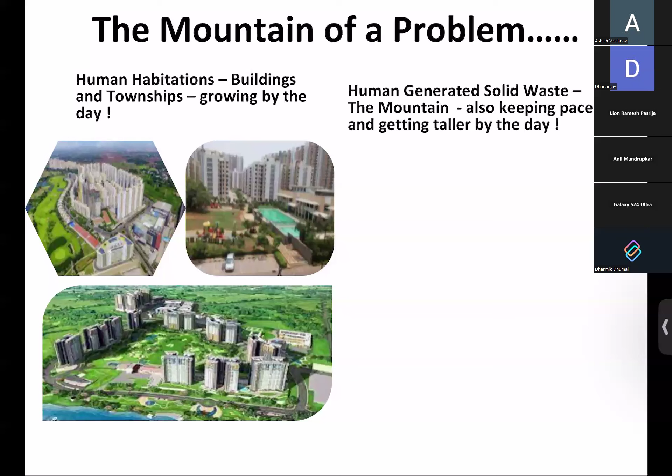But while these things are coming around, what is happening is the people staying in these buildings and houses are also generating even more waste. So the mountain is also keeping pace and getting taller by the day. This is what is happening all around us, and some of you who would be going past Hadapsar would possibly notice it more. I think it happens across Indian cities.

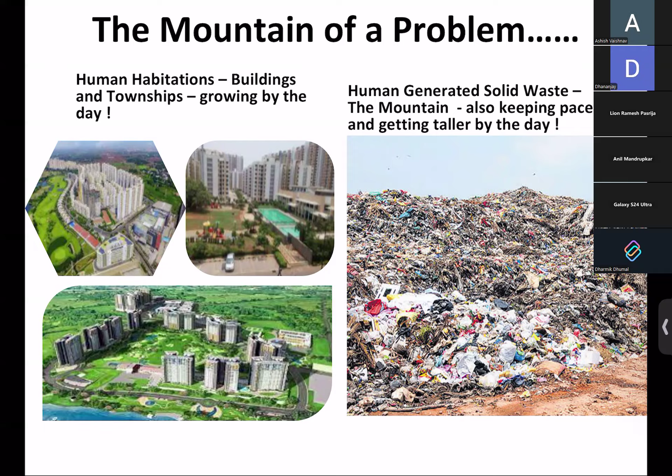Just to give you an idea on what is the quantum of waste India has, India generates almost... now unfortunately this is a surprising aspect that in today's digital age, for MSW there is no credible data which I have found beyond this, which is supposed to be data from 2021. So we are now in 2026, 5 years later, and I still don't know because I attend many forums, but still the figure is 160,000, which is 1.6 lakhs every day.

Tons. So, well, we have been focusing on structures, landscape, amenities, all this, but our focus on waste management over the period has been limited to the liquid part. Now STPs have become most common, and everyone is very happy with, or rather trying to put, collection and transport of solid waste.

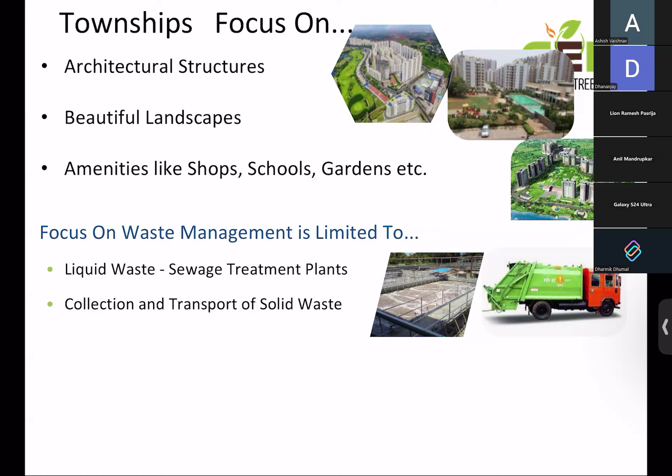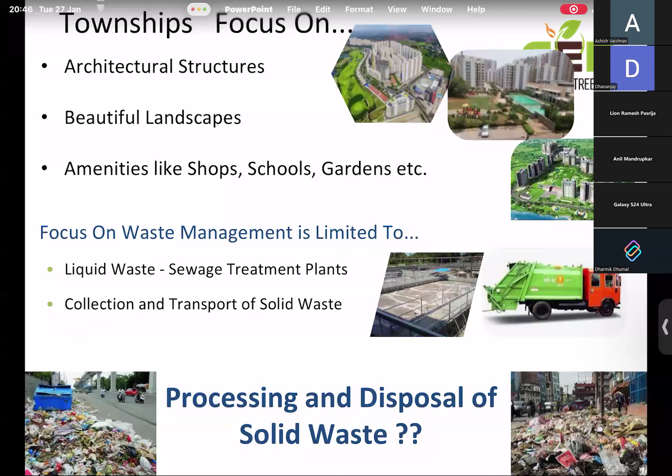You will see a lot of vehicles moving around and people trying to give it to a third party who takes it away somewhere. So we all feel very nice about it. But in real sense, we have not been able to do something on the processing and disposal of the solid waste. And that's why it moves from your houses or societies, and ends up somewhere, because there is no processing and disposal tied up. So this is the big challenge which today we have, and I hope you all agree to it.

So, well, taking a slide from the Swachh Bharat mission again, which has been talked about since 2014, the components of MSW and what are the different types of waste and where they end up. Very clearly at the top of MSW, the word which is told is segregation at source.

Now, at this moment I won't like to comment, but all of you know that even at most homes this segregation is not done. And if at all it is done at home, at the next level, a housekeeping guy or the person who takes it away into the vehicle does not really care. So while this could be seen as an act of someone disregarding it, I think if you get into the basic nature of it, why it would be happening, you will get some more insights into what happens. So we have been also trying to address that part as a part of a solution.

So, well, coming to the two kinds of waste, one is called biodegradable waste and the other non-biodegradable. Now these are all very technical terms, but we would call it wet and dry, which is I think easier. So the solutions given for biodegradable waste are composting, which all of you would have heard, and the newer thing which is biogas. Some of you would know biogas, but the word CNG has now come, which is compressed natural gas, the bio-compressed gas. So that is also coming.

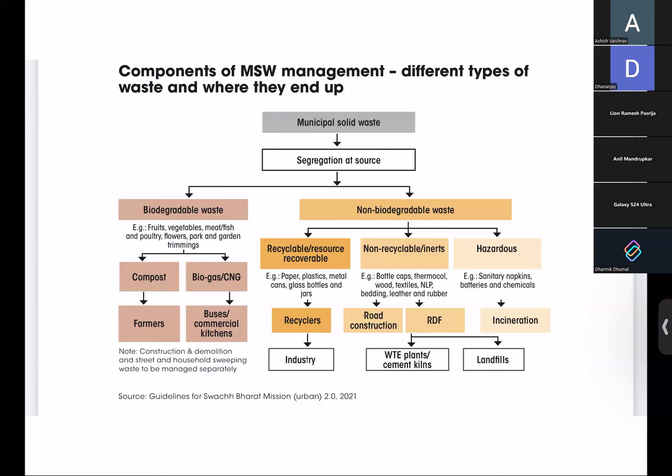And then the hazardous part of the waste, which is supposed to be incinerated - so this is it. But having studied the waste, we have tried to give the classification a little differently. Not very different, but because the waste is the same, we call it wet and dry.

The organic kitchen and market waste is there, and there is also the garden waste which comes up, which is organic in nature - the leaf litter, as we call it, or the horticulture waste. Then the dry waste part - we call them recyclable, non-recyclable, but we added the word combustible to make sure the fuel element is captured. And then the rejects, and then the non-combustible.

So when we observe the waste, we actually spend a lot of time in societies like Blue Ridge and others to understand the waste, where there is a substantial quantum coming. So glass, metal, high-grade plastic, paper, cardboard, and e-waste go into recycling. The non-recyclables are soiled paper, cardboard, low-grade plastic, cloth, mattress, leather, shoes, and all those things. Then the rejects, which are incinerable, are diapers, napkins, and similar rejects. And then the non-combustibles like soil.

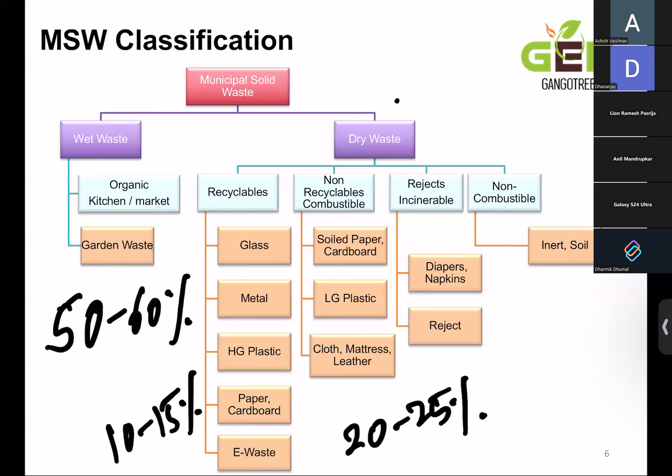So the estimate which we came out with was that almost 50 to 60% of weight becomes wet waste. Only about 10 to 15% of the overall volume is recyclable. And this is the big elephant here - 20 to 25%, which is what you see causing the major issues.

So what we did was also secondary research in terms of which states are leading in the generation. So you have Maharashtra at the top. You will see that population and industrialization are contributors to this. These are the kind of numbers you will see - Maharashtra generates over 22,000 tons every day.

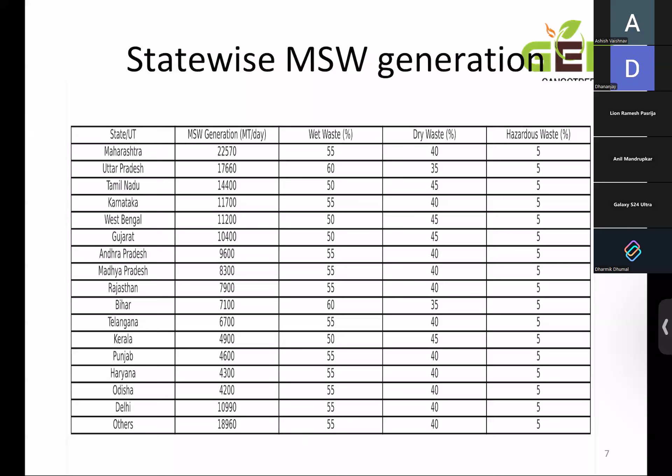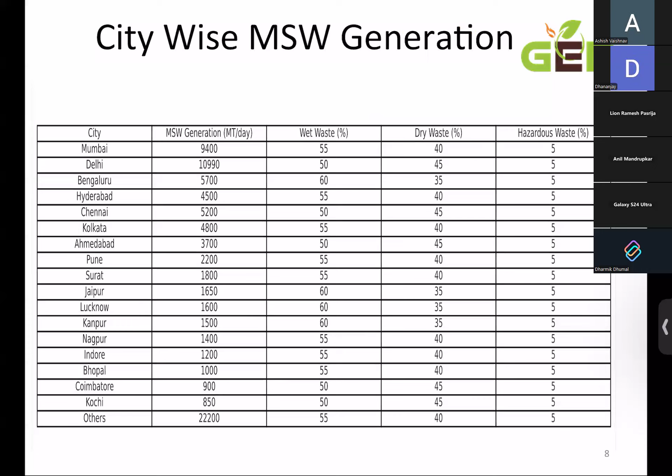So a breakup of wet and dry in terms of percentages is also made. We also studied what are the prevalent solutions for wet waste - like we said, composting and biogas. Composting is done at a residential level, at a medium-scale society level, or many of the older cities used to have very large scale plants of 10 tons and above. Some of you might have seen that. And similarly biogas, which is an alternative, was largely happening at small scale, and now it has started happening at large scale.

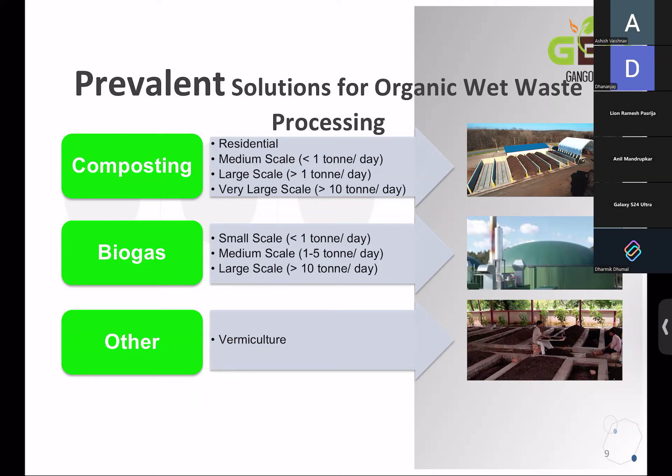People were talking of vermiculture, earthworms, doing all this. But these were all very small activities. If these were the ways you could actually do your waste processing, why has it not happened?

So we studied the shortcomings of the waste solutions. Composting happens, it's a natural process, but successful only for small sizes. As soon as you go for bigger sizes, it becomes more complicated with the kind of space required, multiple handling. It's not an overnight thing. It takes 45 to 50 days, 60 days to get into composting, keeping on trying to give it aerobic nature by moving it, almost like tilling in the garden every day.

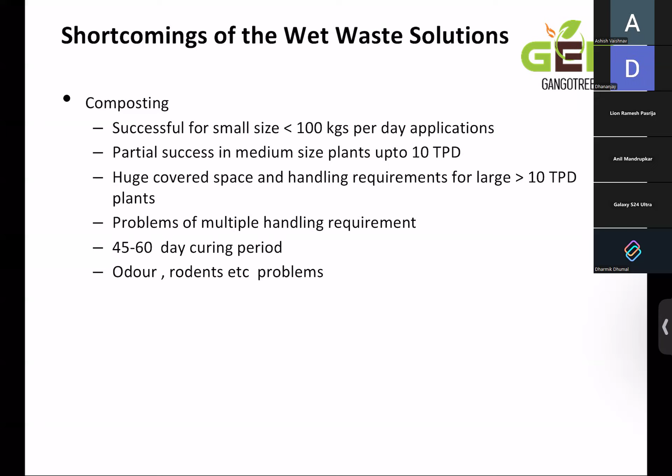And of course it's in an open area, so you have rodents, all kinds of animals and birds. It also generates odor, and there is no major economic benefit. I have heard many places say, why make compost, what will we do with it? And most flats and homes hardly have so much consumption anyway. So people have not been trying much to adopt composting, definitely not at larger scale.

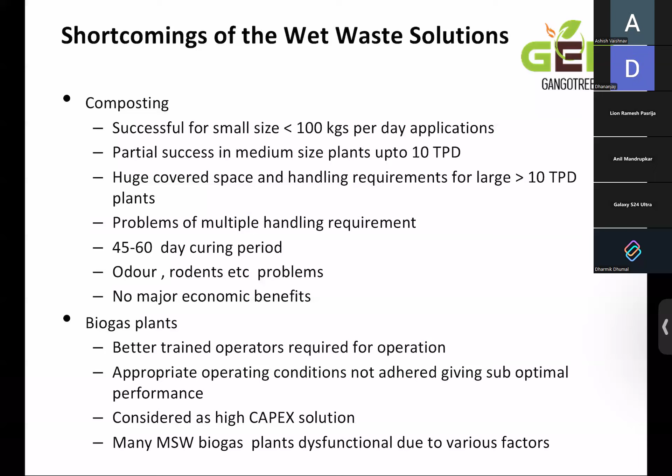So biogas plants, again, there were plants even in Pune, but we needed better operations. The conditions required for operating in terms of technology were also not adhered to. And it is considered a high capex solution, a lot of capital. Many of these biogas plants tried in Pune, Bangalore and elsewhere in a decentralized way became defunct.

Similarly, like wet waste, what are the prevalent solutions in dry waste? We talked of recycling, RDF, and waste to energy plants. So these three are there. So then you wonder, what is the rocket science? Why are we not able to do it?

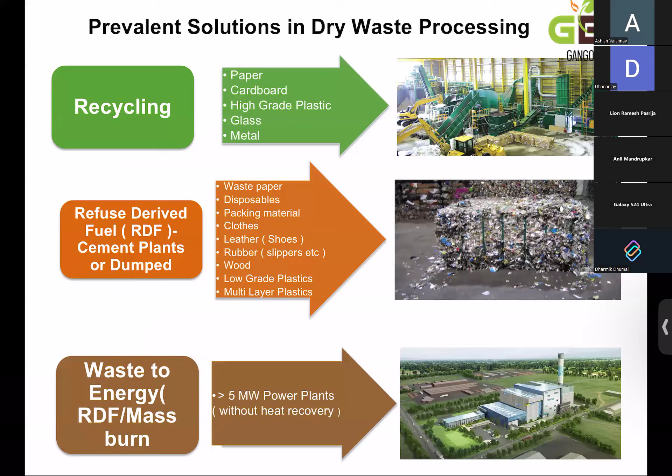So similarly, the shortcomings of recycling technology: gross level segregation is viable, but when you get into a final level of sorting, you need pure material for recycling. You can't mix two types of plastics. Plastics are of 6, 7 types, and that becomes a challenge.

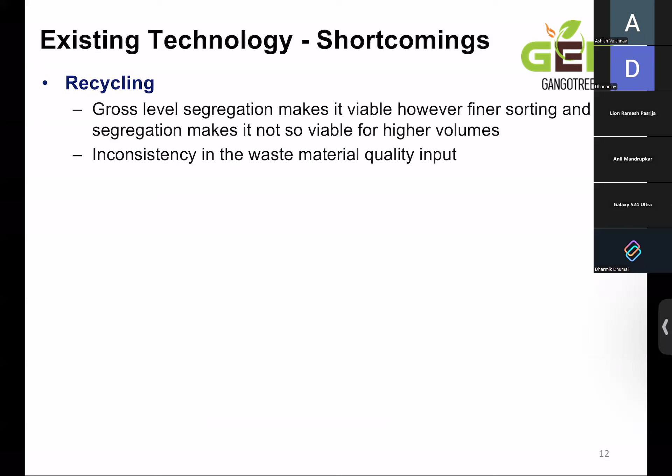Also the quality of the waste material coming in as input is a problem because of the mixing which happens. Similarly, on the non-recycled side, RDF, no one can define what RDF is, because anything left behind is called RDF, as everything burns. There's a lot of mixed waste which happens, and a lot of moisture and water that dilutes the quality of this.

And all this is done at central locations, because from your house, my society, your society, it gets accumulated and goes to places called transfer stations. From there it gets into a bigger truck and goes all the way to Hadapsar. So there's no consistency and there's no control, absolutely no control.

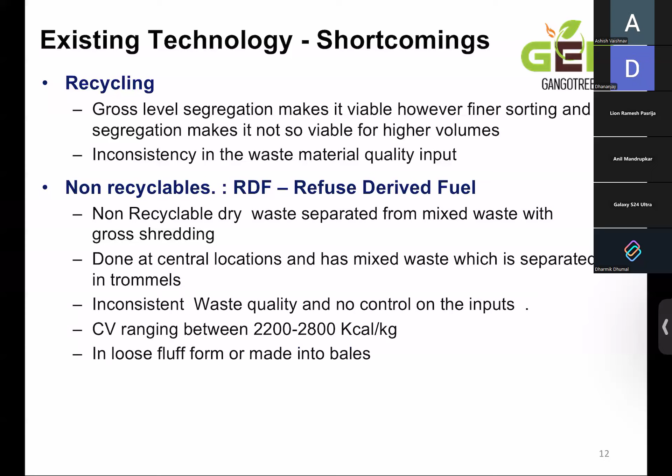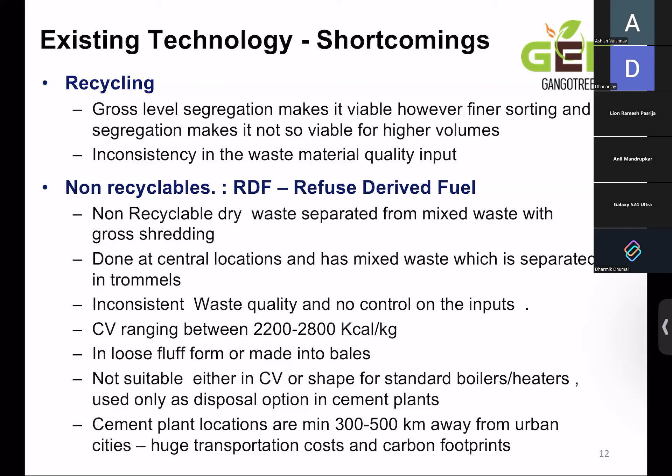And the calorific value is not more than what is stated. Moreover, it can only be in loose form, or it is baled to make it more compact. Otherwise, it's high volume, low weight. There's no size or shape that can be used other than taking it to cement plants, because standard boilers are not able to use this as fuel. And cement plants are far, far away. The closest cement plant from Pune would be in Karnataka, or otherwise you go to Chandrapur, which is 800 kilometers away. Can you imagine your waste traveling every day 400-500 kilometers?

The waste to energy plant is a technical subject. I won't go into too much detail, but just to share, it's hugely expensive compared to conventional power plants to put up a power plant using this waste, almost 5 times more expensive. Calorific values are inconsistent. And because this is only producing power, no waste heat is captured, unlike in Europe and other places. Here the total efficiency of this plant is not more than 20-22%.

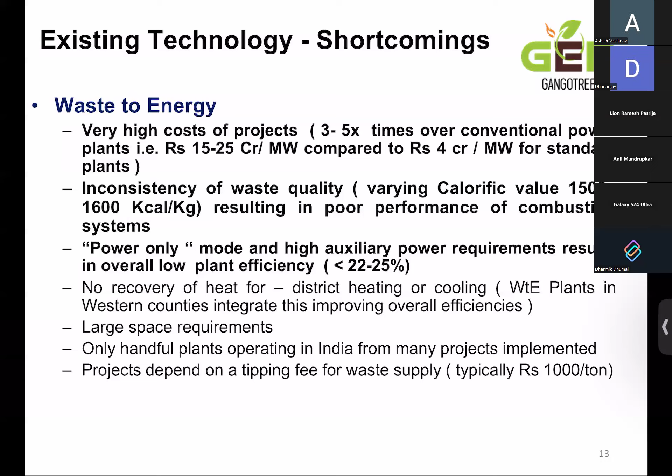So there are huge space requirements, and it usually depends on centralization, because you need 700, 800, 1,000 tons to be given every day. This means the waste has to travel to a single location from all over the city. You can imagine the kind of crisscrossing this would lead to. And then the power tariff to justify this kind of cost is very high, so you pay for disposing the waste and buy electricity at higher cost. That's why in Indian conditions, while plants are being put up, they are not being considered a huge success.

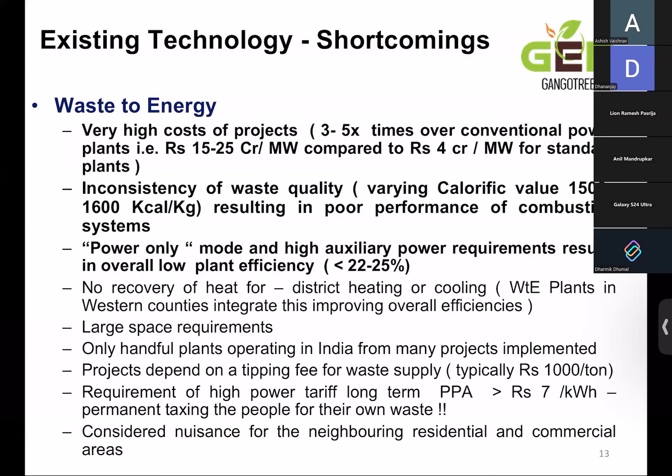Well, we need to change the outlook from waste to a resource.

So MSW has a dry fraction, almost 40-50%. And of that, 60-70% is non-recyclable and getting dumped, because all these solutions are not easy to implement. And it gets burnt in an uncontrolled manner.

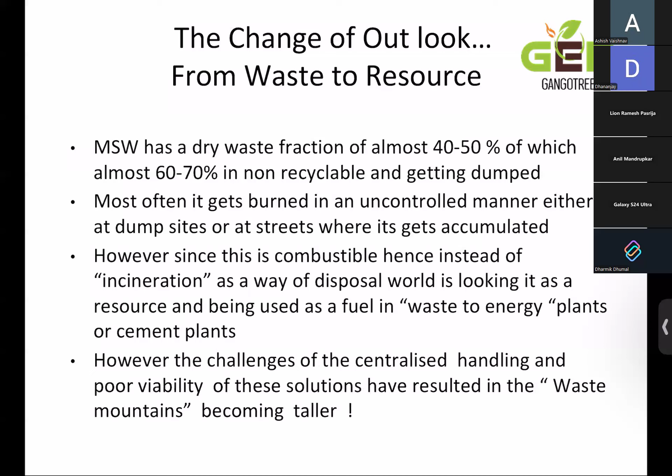And because of the challenges of centralized handling, these solutions have had poor viability, and that's how the mountains get taller. So we just thought, sometimes using a better word gives a little more positive impression.

When I say incineration, it is also burning, but it's primarily like no use of that burning. You are just destroying the material by using fire as the way of the process.

Whereas if you look at combustion, it's like using your vehicle, you're combusting petrol to drive you. You are combusting fuel in a boiler to give you steam, which will drive either the process. So combustion is a better word, which is more scientific in nature.

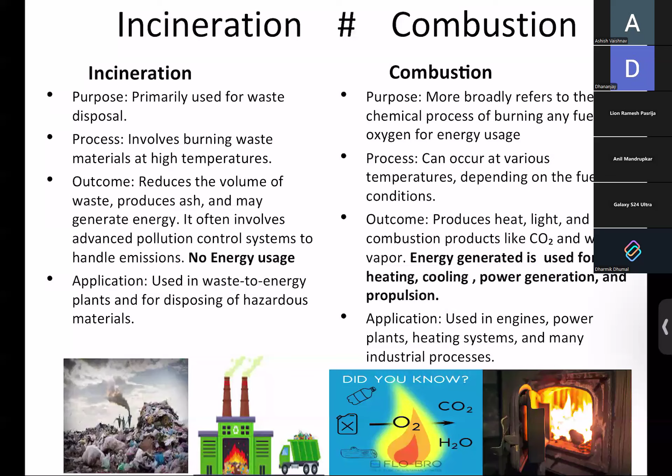Incineration is considered more as destructive, where combustion is more positive. So energy is generated and it can be used for purposes of heating, cooling, power, or propelling something. So we feel that fuels are being used in these equipments as combustion.

And very often people talk of emissions, and words which are used are dioxin, furans. So people have to understand that this essentially happens because of chlorine, and these are the main items in our daily waste which have chlorine possible.

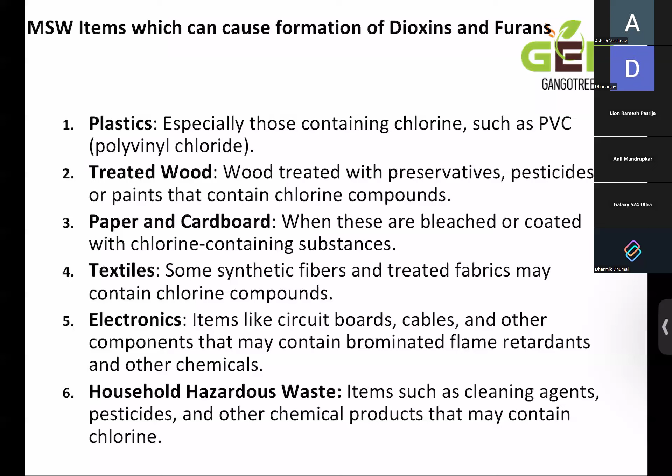And you would see plastics, treated wood, paper, cardboard, which are hardly bleached. So normal items like our textiles, paper, don't have this. Electronic items, which are not a daily item, and it doesn't get into your daily MSW stream anyway.

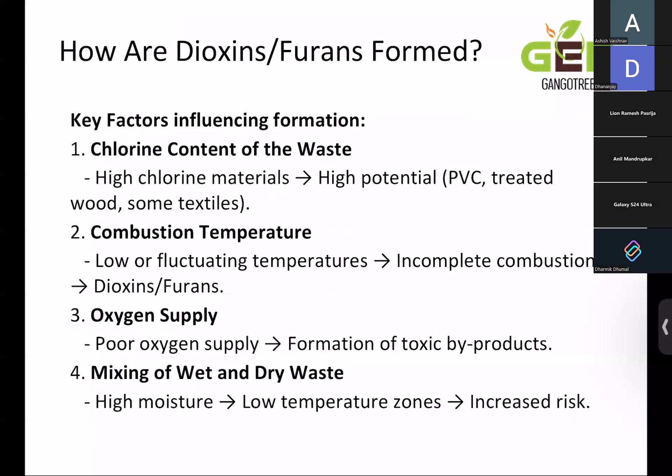The other is, for dioxin and furan to form, chlorine content has to be high, combustion temperature is low and incomplete, or oxygen supply is poor, and there's mixing of wet and dry waste. So these are the reasons why dioxin furans could be formed.

And we did a study where each of these major types of waste which we get - so PVC, which is chlorinated plastic, essentially pipes which are used, which are not our daily item of waste. Everything else is low. And the other danger part is the mixed waste, where food waste with chlorinated packaging comes.

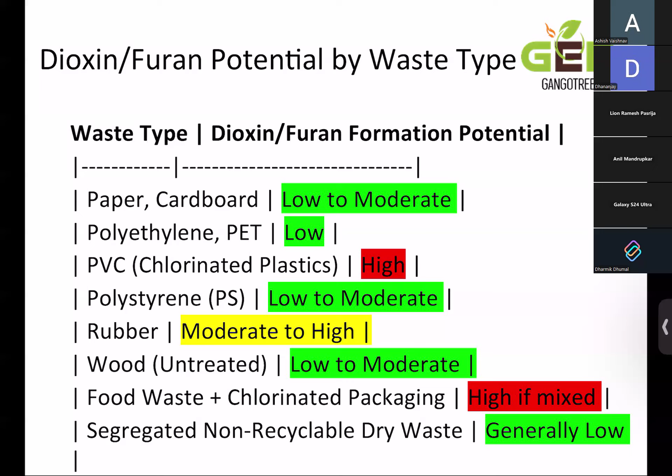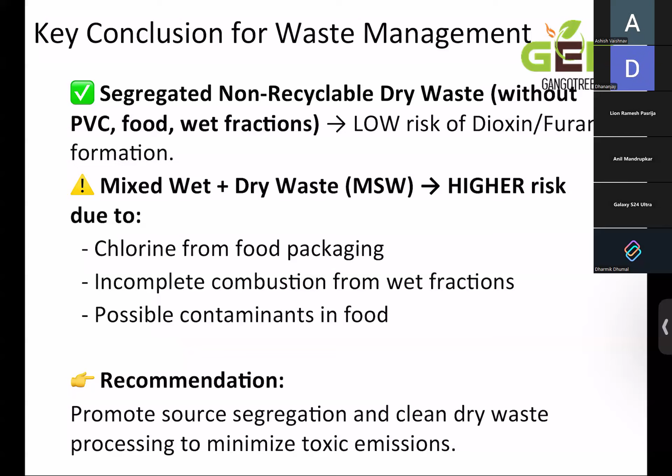Where it became high. But when we are talking of segregated dry waste, this doesn't become a problem. So this is where we are saying that segregated dry waste is low risk, whereas mixed waste will be high risk. So promoting segregation would ensure that anyway you have clean dry waste.

So coming to a solution now, so far I have taken you through a journey of what is happening today and what have been the kind of worries people have around the waste being burned. So, well, we had a mountain of a problem, but we have come out with a molehill of a solution.

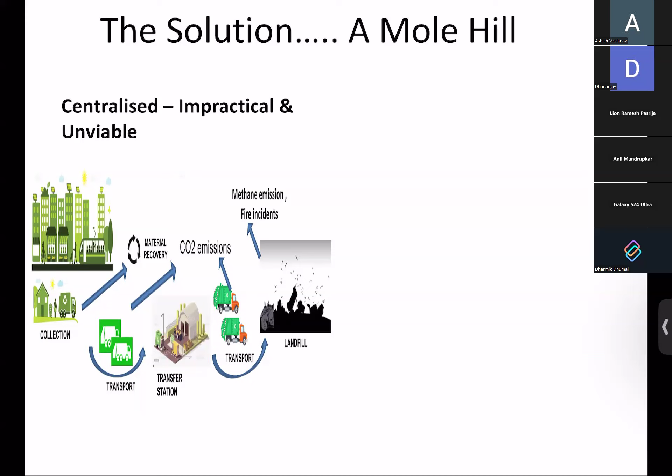So the decentralized approach will unlock this, where segregated waste can be enforced because there will be a line of sight. While you do the recycling, you can also at the same time carry out the material recovery and the pelleting. And if you are able to bring the wet waste also, a biogas option can be done at a central location. Very ideal for townships.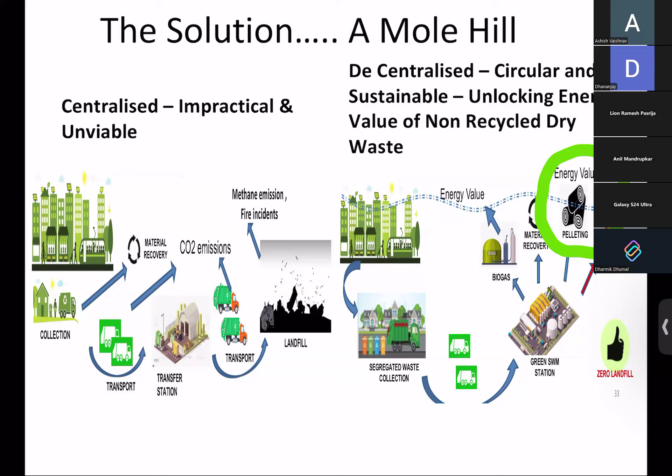We have tried to work on this, essentially a zero-to-landfill kind of approach. So we say this is what we will be talking on - unlocking the energy value of the non-recyclable, the utilization of the non-recycled. So we say no to the centralized approach and yes to the decentralized.

A big change in mindset of people is needed. We have not been able to convince any of the corporation people. So while we are not disheartened, I said time will tell.

Slowly, we will have more of these things coming up. Maybe first it will come up in smaller places where people want these solutions, like we have done in Ozer. We are doing it in Salem now. Hopefully we will have it coming up very soon in some nearby places, and we have done it in IIT Bombay. We are doing it at 4 or 5 locations in Gujarat. So we will hopefully be able to prevail and do that.

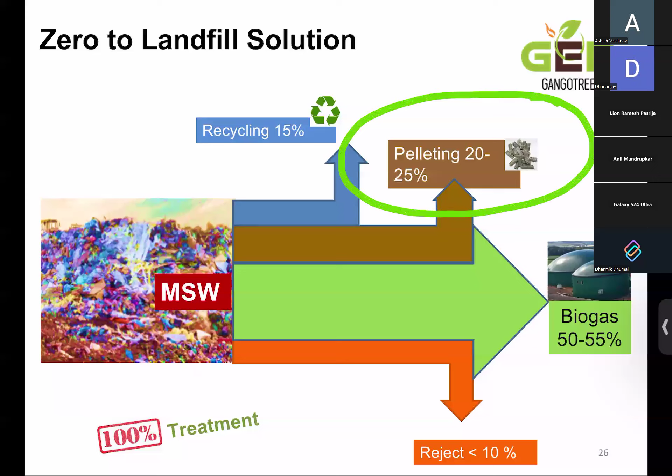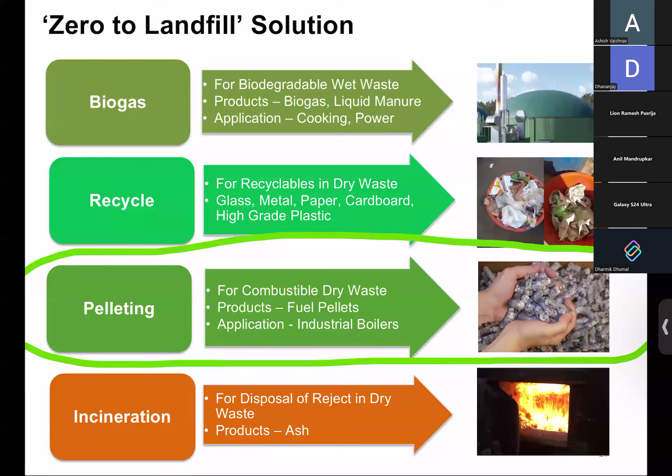So our solution is biogas, and of course recycling too. But our focus, as the innovation, is trying to convert the dry waste into pellets. We have gone through this test of technical feasibility, economic viability, environmental sustainability, and very importantly, social acceptability.

You might see that wherever there is a central plant coming up, the nearby communities are getting affected - not just because of the smell and the sight of waste every day, but also imagine the whole transport keeps coming to the same areas every day, and they are not one or two, they are tens and hundreds in number every day.

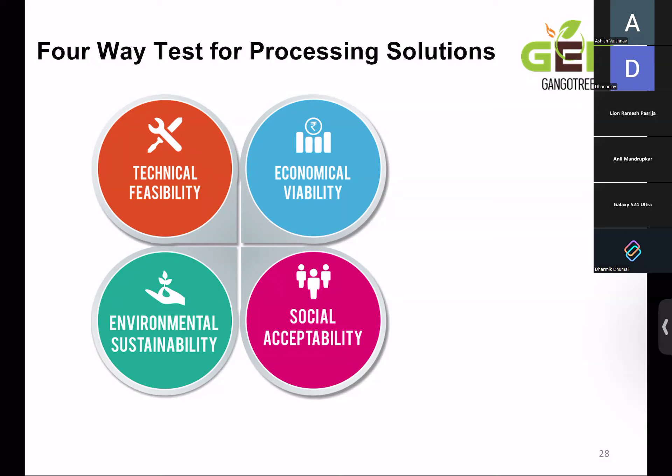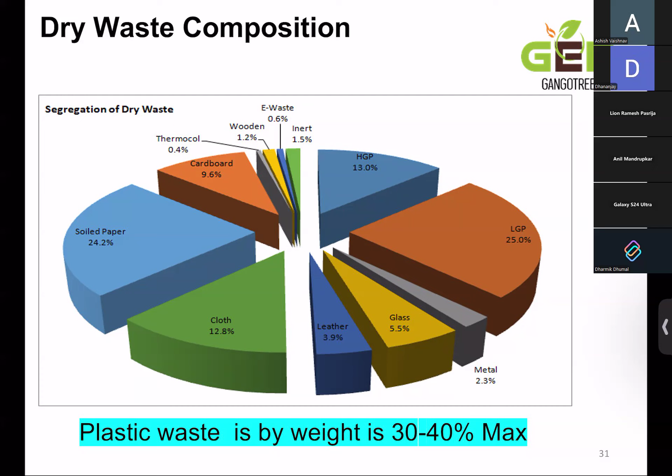So coming to the dry waste part, this is the analysis we did of what total percentages by weight come out. Because the density is low for some materials, by sight it might look bigger, but if you look at a textile piece or a cardboard piece, it's far heavier than a plastic sheet or bag. So this is the composition there.

Then, because we were looking at combustibles, the most important aspect is the calorific value. So we calculated the individual calorific value of each - paper, cardboard, various types of plastics, cloth, jute, chappal, all of this. We found that nothing is less than 3,000, and plastic, being a petrochemical product, is more than 7,000.

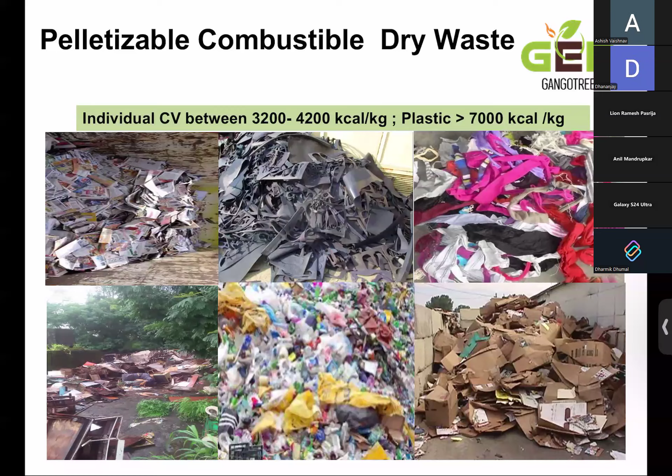So this is what finally we've been able to say - do door to door collection, and from there take it to a center where at the first stage itself you get into processing. The unwanted material can be taken away, and then we put it into shredding and pelleting.

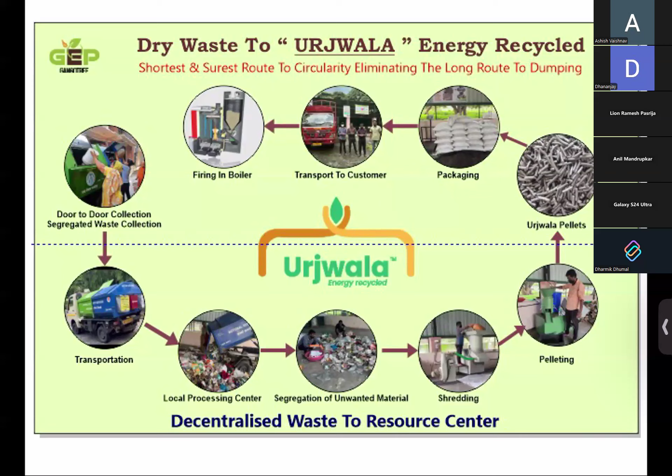The pellets which come out, we call them Urjwala - energy recycled. We pack them and they are taken to a boiler which is nearby in the city itself. So this is what we are doing.

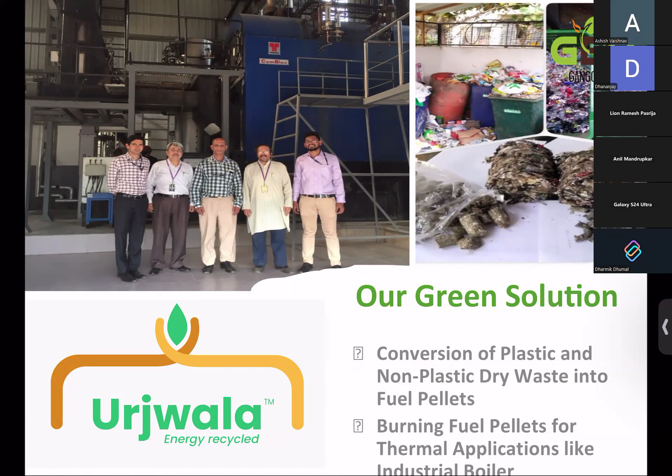This is our solution, and we are working with a company, Thermax - my old company - where we have used these pellets as a co-firing fuel along with other solid fuels like coal and biomass. So this is our green solution.

So this is typically the product we are trying to offer, and we are selling it to a customer - otherwise in the waste industry there's no real customer. We are defining the values of this, and you'll notice our calorific values are in the region of 4,000 plus. The ash and moisture are all within control, and very importantly, they are being used in standard boilers as co-firing fuel.

Very importantly, it is all within 5 to 50 kilometers of an urban area, because this is where industries - whether chemical, pharma, food, or beverage - which use heating equipment, are located. So this is what we do. The waste you see on top gets into shredding and pelleting, and we get pellets here.

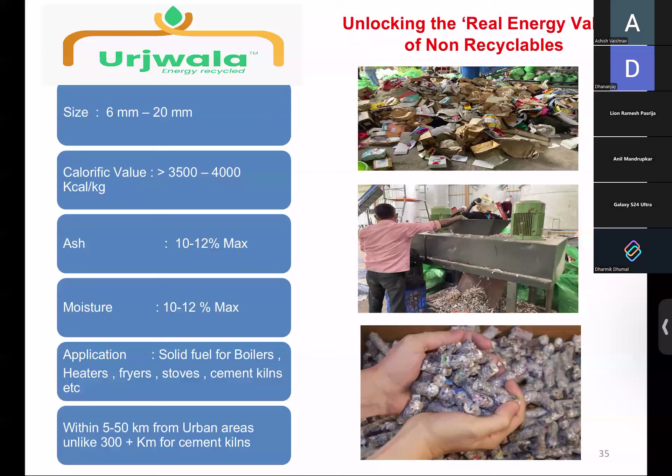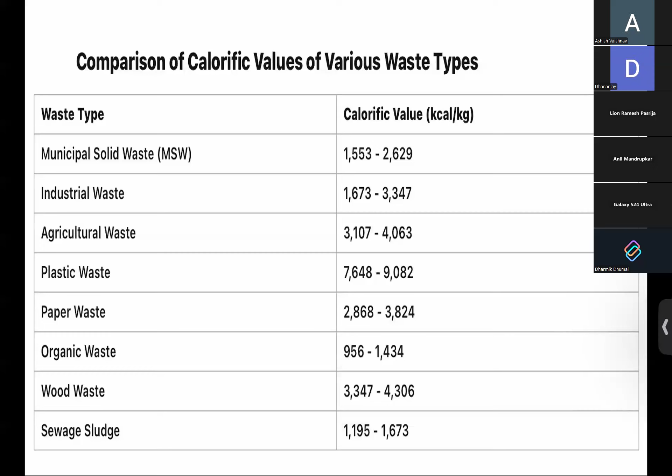So just to compare the calorific value of different types of waste - you'll notice organic waste, which is wet waste, is around 1,000, the lowest. Whereas plastic waste is almost 8,000 plus, and paper waste is also close to 3,000 plus. MSW as a whole, the total quantum, is on average about 2,000 to 2,200. So this is where we call it Urjwala.

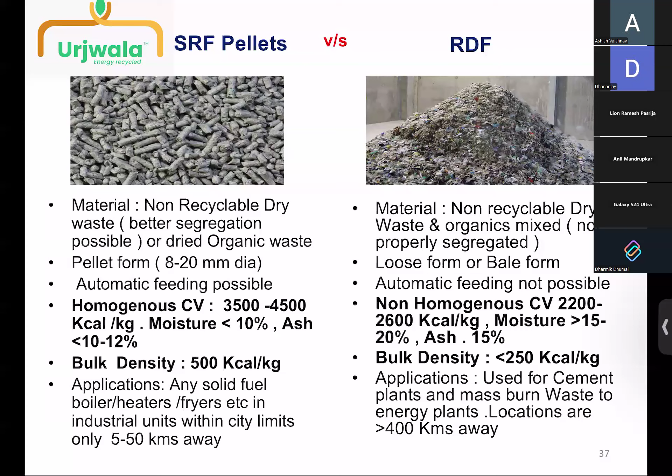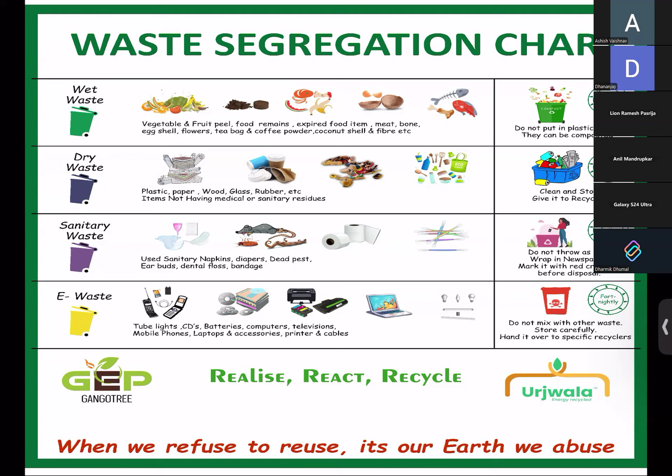If you're able to bring the same material in a segregated way early as dry waste, we are able to achieve high values, whereas RDF - the same material which has gone into mixed form - because of how it's handled, ends up like this. So this is what we're trying to promote as a segregation chart to people - that we need source segregation, which is very important.

This is what we are looking at, addressing this not to a cement plant, but standard boilers. India sells almost 8 to 10,000 solid fuel boilers every year. So the consumption on a non-power basis would be more than 150,000 tons a day, and the Pune region itself would be consuming 5 to 7,000 tons per day.

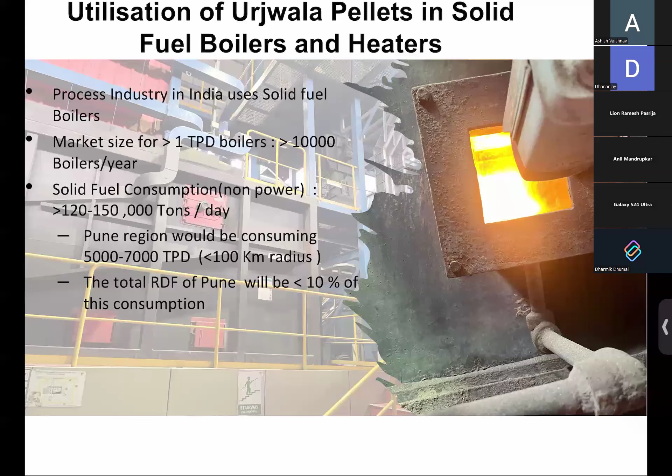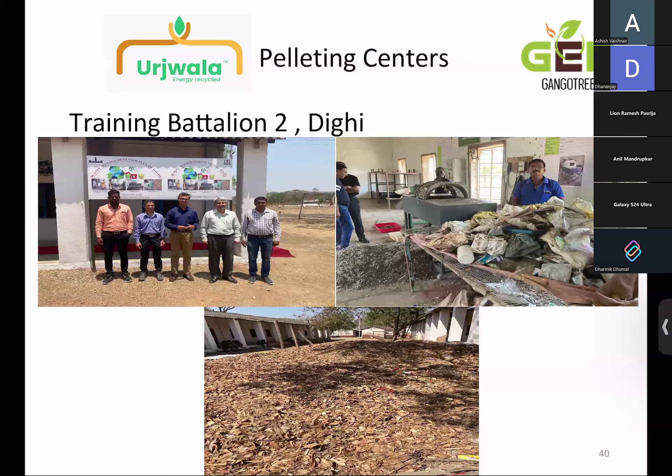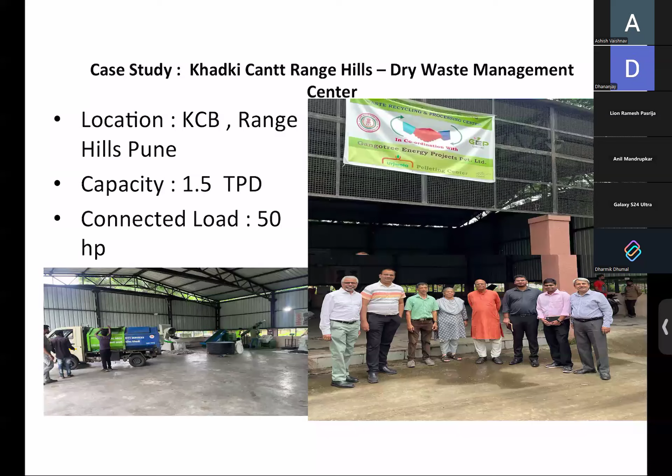So the total RDF of Pune, if used there, would be less than 10% of that. We started our work in Pune with BEG, the Bombay Engineering Group Training Battalion in Dighi, in the Army, doing not only dry waste but also garden waste there. Then two years ago, we set up this plant at Khadki. Some of you have visited it, and with the Cantonment Board we have done this and have been running it. So I'll take you through a small video for those who haven't been able to go there.

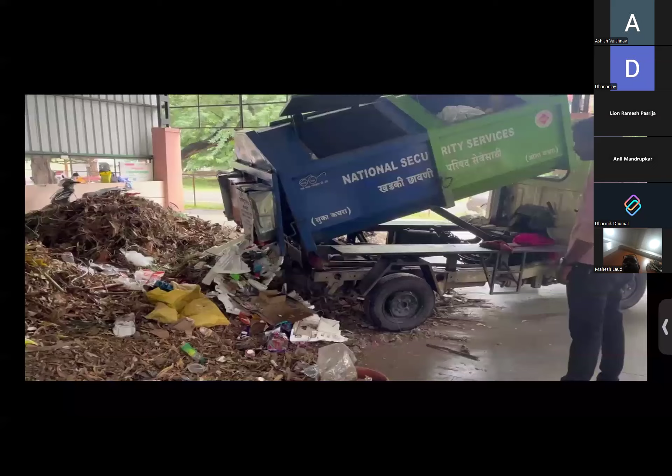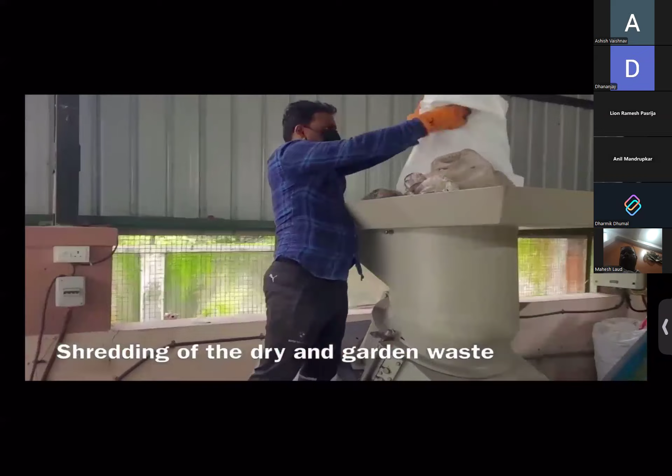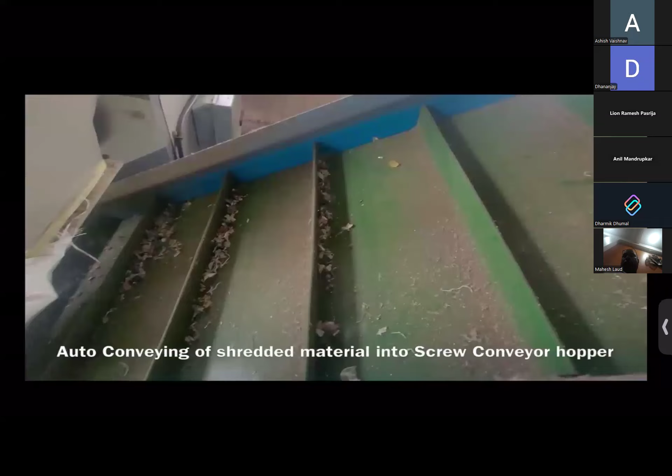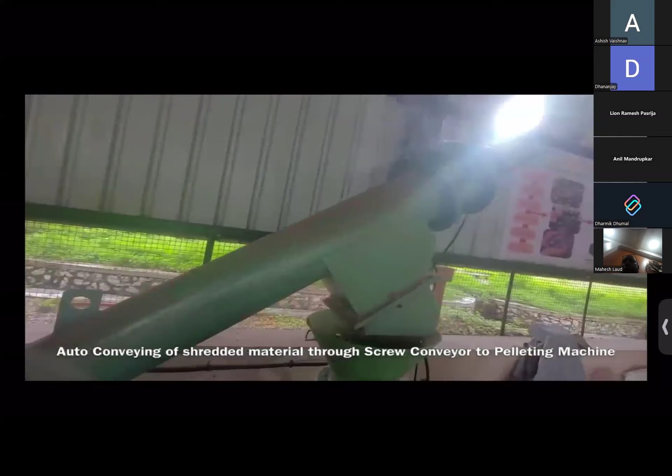Then we remove the glass, metal and stuff like that, and also the wet waste, and it goes to the shredder here, you can see. Then a conveyor takes it into another hopper. From the hopper it goes through the screw, and then to the pelleting machine.

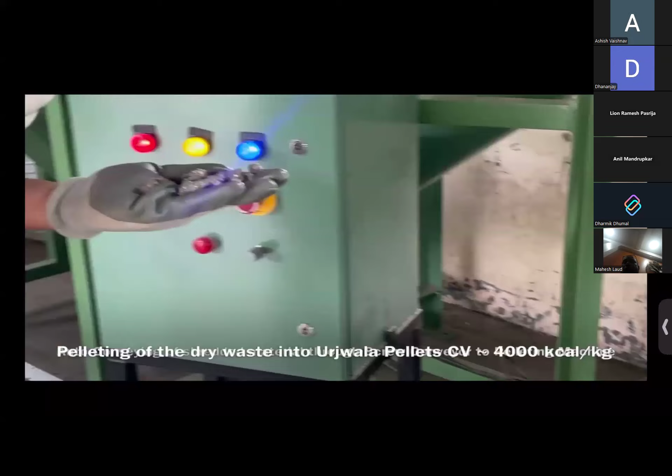And this is how the pellets are. These pellets are then bagged, weighed, and loaded into trucks, and taken from this to Chinchwad itself, where the Thermax boiler is operating. So no more rag pickers for this, they are Urja Daatas.

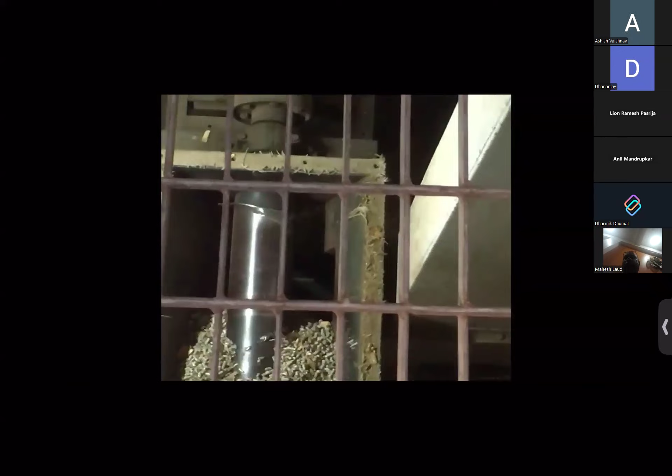So we have branded these pellets as Urjwala, calling it recycled energy. This has gone to a boiler in Bhosari itself, going through automatic feeding. You can see this is the boiler, and you can see the flame also. We worked with the R&D of Thermax to sort of prove this.

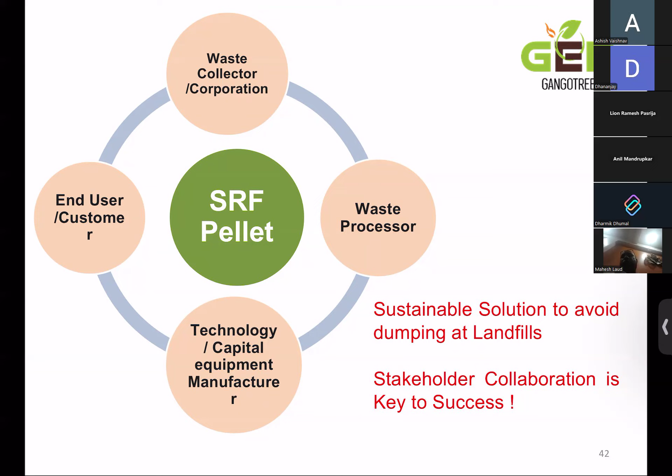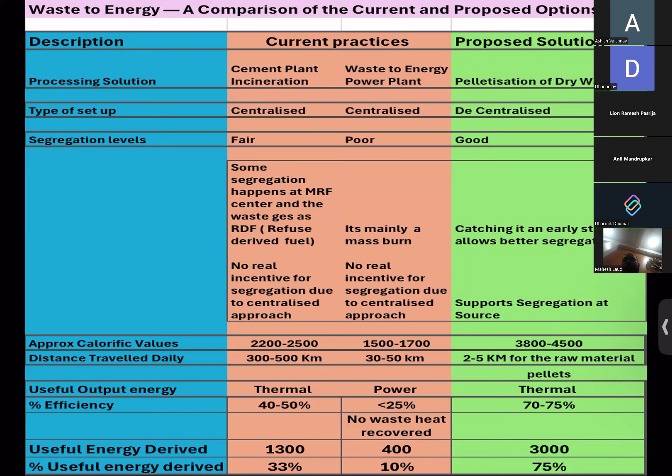So this is where we feel all people have to come together, and stakeholder collaboration is key. This is the comparison of how our proposed solution is far more efficient in every way. We are able to usefully recover almost 75% efficiency compared to 10% of a waste-to-energy plant and 33% of a cement plant.

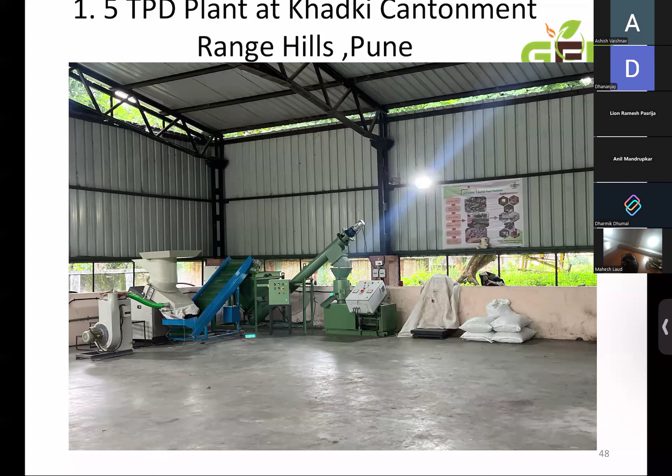This is our plant which we have given to Daund Sugar, and now to another sister company of its, Ambalika, we are giving a repeat there. We have also given it to Salem now, and that got commissioned a few days back. This is the kind of area we require, only 250 square feet for our equipment, the balance is for handling the waste.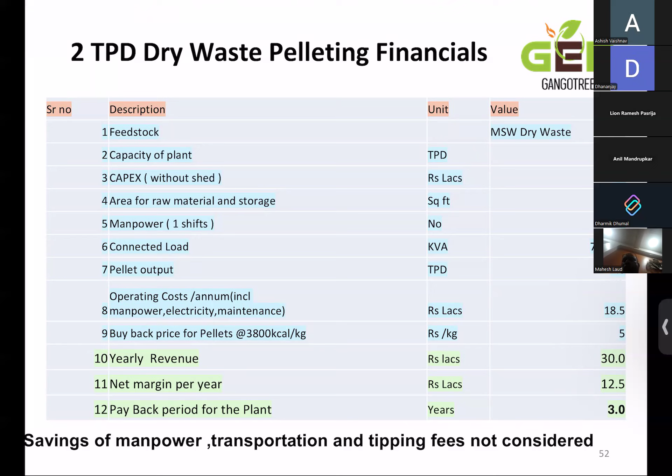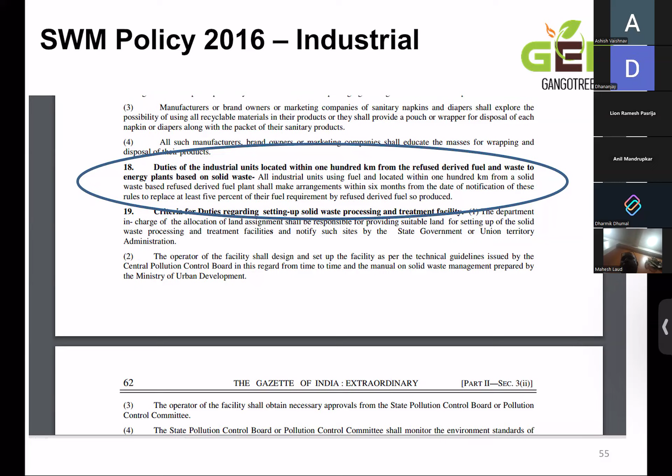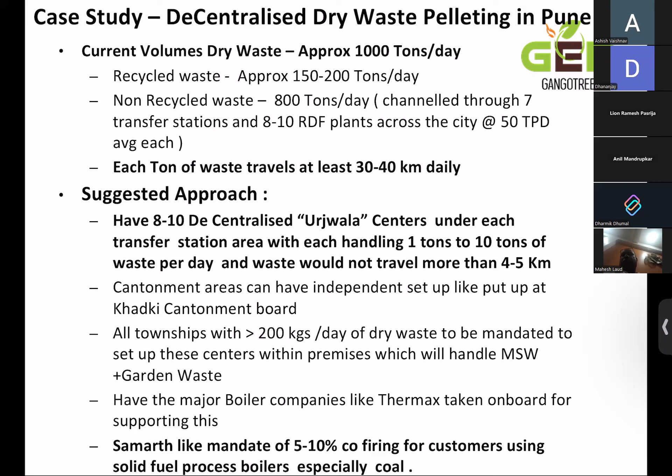So if we do it in a place like Pune, we can possibly set up a plant in every ward. Everyone knows there are 41 wards in Pune, which we call Prabhag due to elections. Each Prabhag could have 2 to 3 such centers, between 80 to 100 centers total. I think the waste does not need to travel beyond your Prabhag. This is something we'll try to take up, and with support of people like you, I'm sure this is very easily possible, not only in Pune but across cities. There is no rocket science here. This is where we are slowly growing.

Currently, mostly in Pune, Bombay. Now we are going to Gujarat, and now we are moving to South. And we have also a site in Rudrapur.

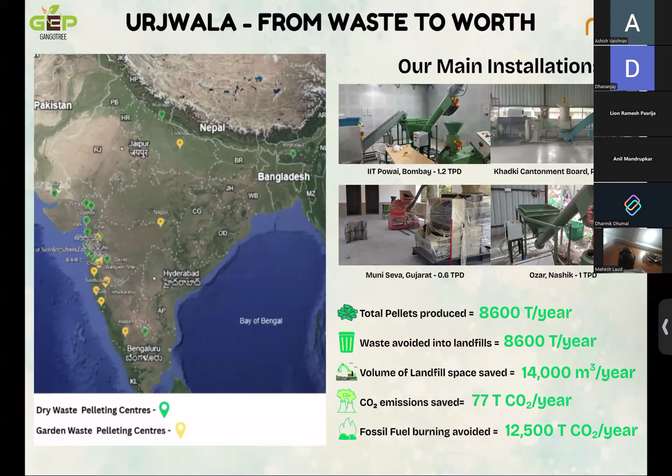We are not being very aggressive in marketing because we want to make sure that the solution works reliably, and you can see this is happening.

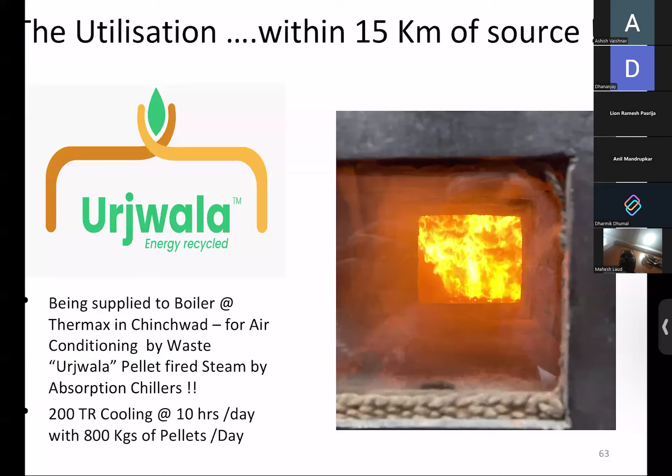Incidentally, the pellets fired in the Thermax boiler at the factory are actually doing air conditioning, because the technology Thermax has is using heat to do cooling. So can you imagine urban waste giving urban cooling? The impact is very high on the environmental front.

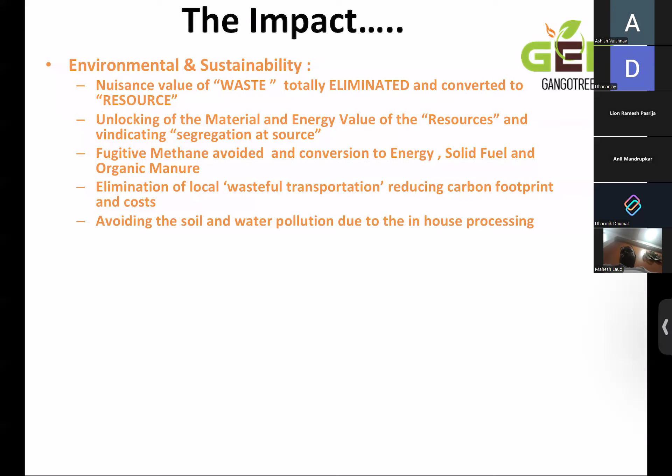I don't think I need to say you are eco-friendly people, so you know what it means. Very important, what we are trying to say is the social impact, where the community of people in waste, typically called rag pickers or waste pickers, we are converting into a resource giver, or Urja Daata, which is gainful employment, respectable, and very important, because if it happens in a decentralized way, there's ownership for people also coming up.

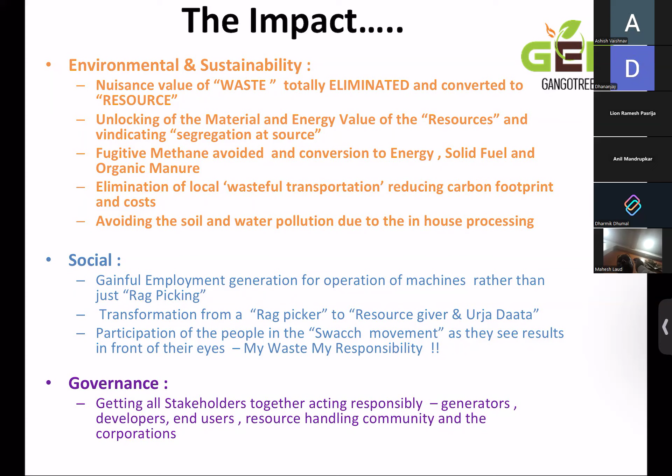My waste, my responsibility. Organizations like yours taking up such causes can definitely support this very well and see the results right in front. And of course, from a governance point of view, all stakeholders coming together and compliance to this.